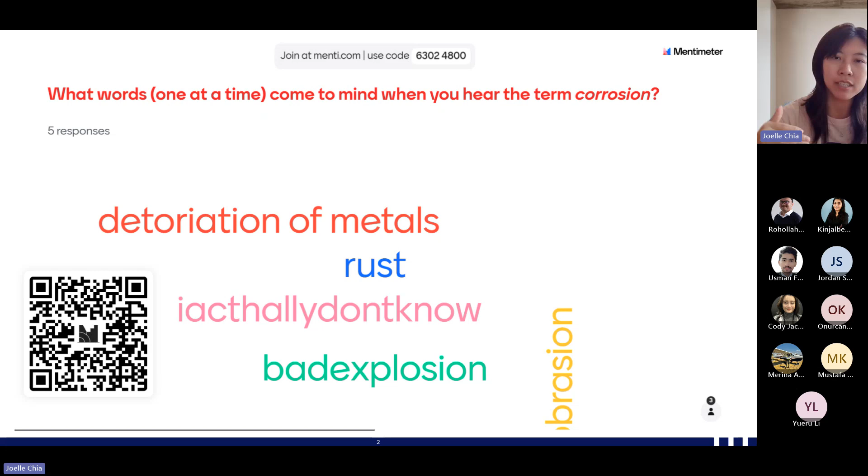So yeah, basically corrosion, I'll explain a little bit about corrosion, specifically atmospheric corrosion. So corrosion happens when some salts or some chemicals in the atmosphere, in the environment, come into contact with metallic structures or metallic materials, and it leads to degradation of the metallic layers. So any kind of metals, they have different kinds of layers in their materials. And when that material degrades, that's corrosion, which means that material is being damaged, a deterioration of metals.

So it can occur anytime. It can occur very quickly. It can occur very slowly, depending on how corrosive that atmosphere, the environment, is. And this can also occur to any kind of metallic structures, including civil structures, the bridge, your car, your computers, as well as aircraft.

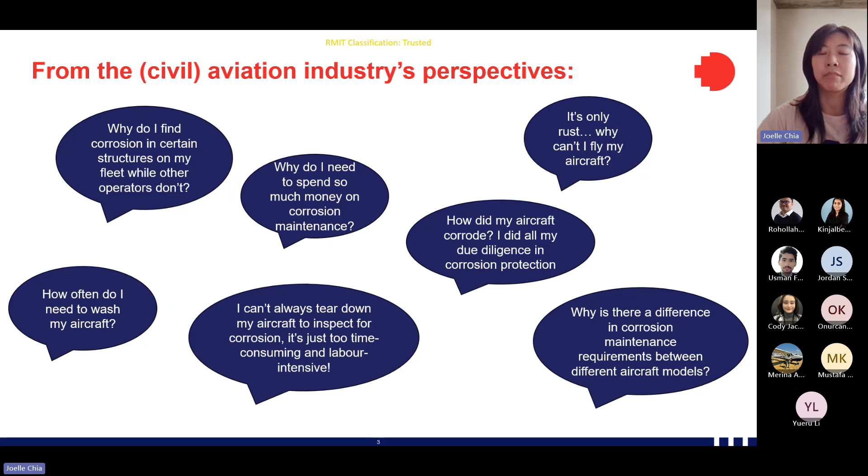So from the aviation industry perspective, most aircraft owners, operators, and mechanics are also not corrosion experts. So they have no idea what corrosion is, but they see it happening on the aircraft. And what concerns them mostly is the cost of having to repair the metallic structures due to corrosion, and the time it takes, as well as safety concerns, because when the metallic structures of the aircraft degrade, it could lead to aircraft accidents. And that has happened a number of times over the past 30 years in aviation history.

So we go on to another question. In this question, I would like to hear your thoughts on what you think can be done to minimize corrosion on aircraft structures. Use of better materials, yes, in terms of redesigning, for example, now aircraft are going more towards composite structures that are less prone to corrosion. So that's one part of it.

Test materials for the long term. Yes and no, because as I said, corrosion can happen in a very short time depending on how corrosive the environment is. So even if you test the materials for the long term, there could be conditions that you are not able to test upfront, which leads to the material degrading due to corrosion in the short term.

So one of the methods to minimize corrosion is to predict when and where it is happening so that you can implement predictive maintenance and inspection before the structure fails. So corrosion prediction models have been developed over the past few decades. And this review that I reference here goes into more details on those established corrosion prediction models.

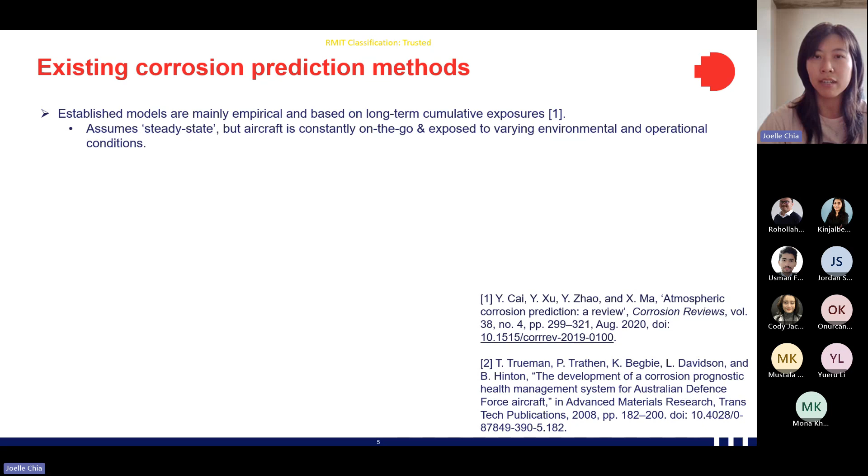But the limitation is that these models are mostly based on long-term cumulative exposure, and they assume that the microclimate and the development of corrosion are in a steady state that averages out over the long-term period. And unfortunately, that would not apply to an aircraft because an aircraft is a very mobile machine that is constantly exposed to different environmental and operational conditions. So we can safely assume that the microclimate and the development of corrosion will be quite variable.

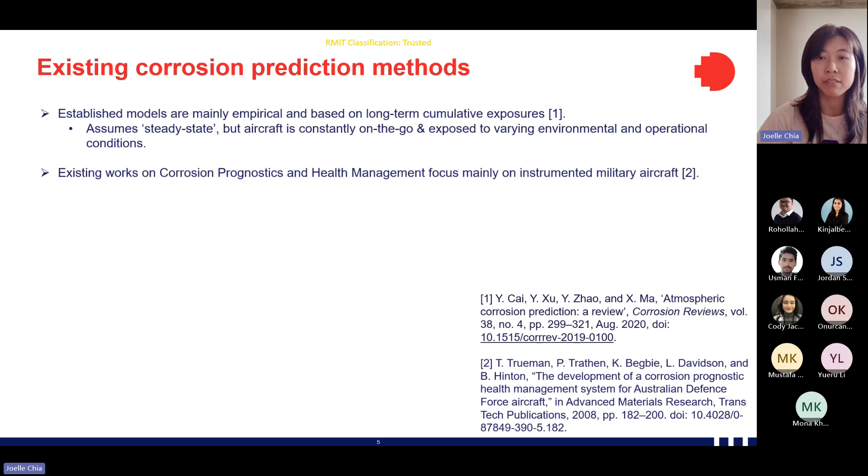And also taking on this assumption, the Australian Defence Force developed a corrosion prediction system in their military aircraft by instrumenting the aircraft with environmental and corrosion sensors. But the problem here is that whatever applies to the defense or military aircraft is not transferable to a civilian aircraft like the commercial aircraft that airlines operate, or like the private jets or even smaller training aircraft like this one over here.

Firstly, they belong to different regulatory bodies, so different regulations and certifications apply. And secondly, which is the most important factor, is that civilian aircraft are more sensitive to weight additions. So that is to say, if we add sensors onto this sort of aircraft, that's adding more weight, which is more payload, and that translates to even higher operating costs. So at this point, the airlines or the aircraft owners would say that's too much trouble. They will just continue washing and inspecting their aircraft for corrosion, and then we're back to square one.

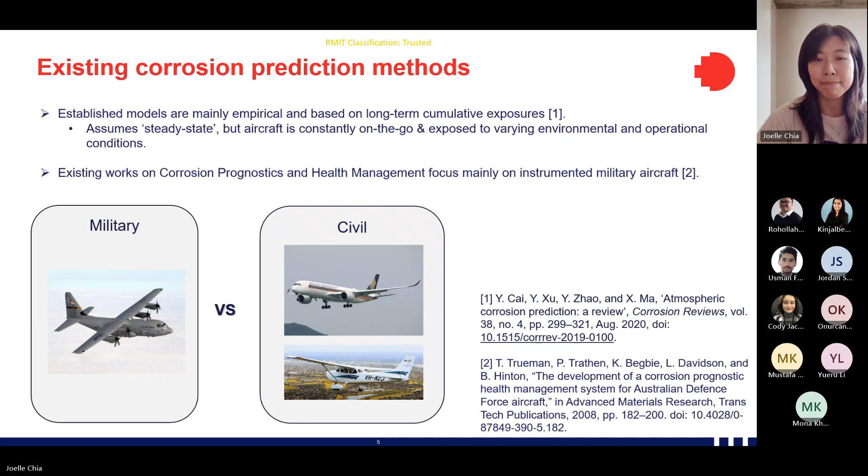So drawing from the identified research gaps, my research integrates the essence of corrosion models, actual operating environment parameters, both in flight and on ground, into an airframe corrosion digital twin. The objectives of my research will be to use an appropriate corrosivity estimation model, which will be defined along the way, to estimate the corrosion exposure in aircraft structures during its operational life. And to accomplish this, I will be using actual in-flight and ground environmental and operational parameters.

Then next, I will develop a prediction model to predict the location and severity of corrosion damages based on the aircraft's operating environment. And then finally, I will develop a unified airframe digital twin with a simulation environment that can support proactive corrosion control and management. So the purpose of integrating the airframe digital twin is also to enable real-time monitoring and prediction. So from these objectives, my research will address three main research questions. And all of these are according to the objectives formulated here.

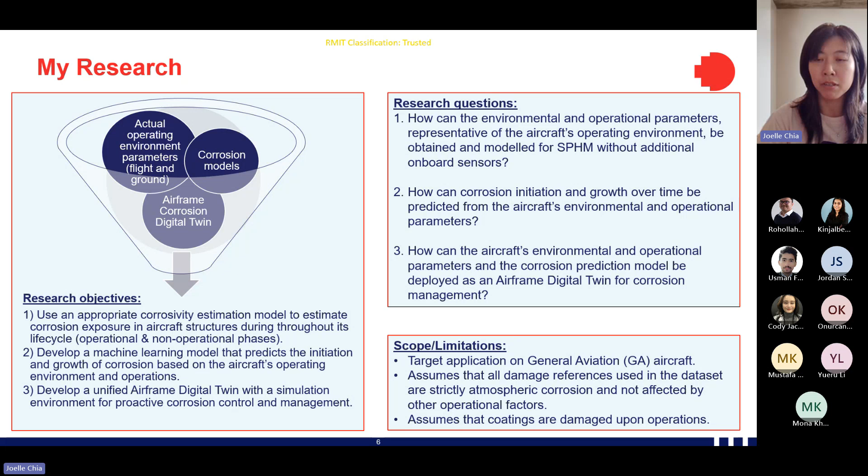And there are certain boundaries within my research where the research is scoped around the application on general aviation aircraft. So for example, flight training aircraft, in which case I have also engaged with the Aviation Academy in our university to obtain actual aircraft data to work on. This research will also only account for atmospheric corrosion in aircraft structural damages, which means we will assume that all damage references used in the dataset are only due to atmospheric corrosion and not contributed by other factors such as fatigue or other operational events. And finally, we also want to assume that coatings are damaged upon operations, so we will disregard coating degradation for simplicity.

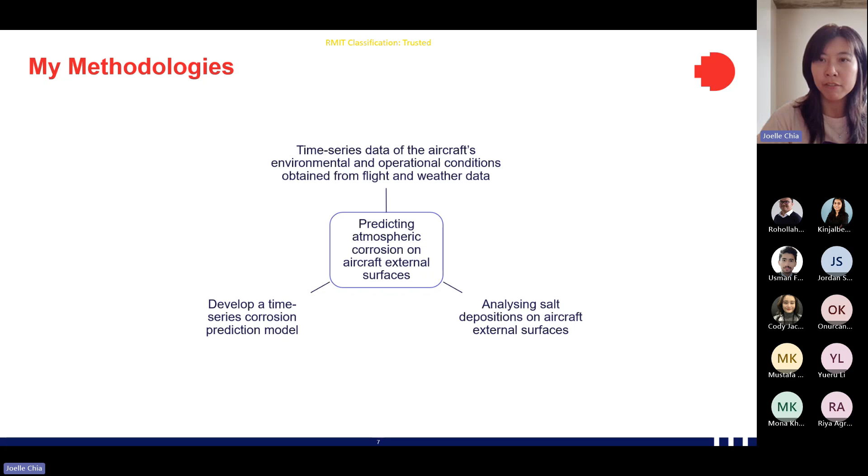So in terms of methodologies, in my research, since I am focusing on predicting atmospheric corrosion on the external surfaces of aircraft, atmospheric corrosion refers to the corrosion that is caused by the interaction of the material with its environment, which is, for example, temperature, relative humidity, how wet the atmosphere is, and the presence and concentration of corrosive salts.

So my first step is to answer the first research question, which is to model the varying environmental and operational conditions in a time series. I am using the flight data from the aircraft's existing flight instrument systems to obtain the geographical coordinates of the aircraft and the operational conditions such as altitude, accelerations, and airspeed over time. And then for environmental parameters such as temperature and relative humidity, I use weather data collected from the Bureau of Meteorology weather stations that are closest to the aircraft at each time.

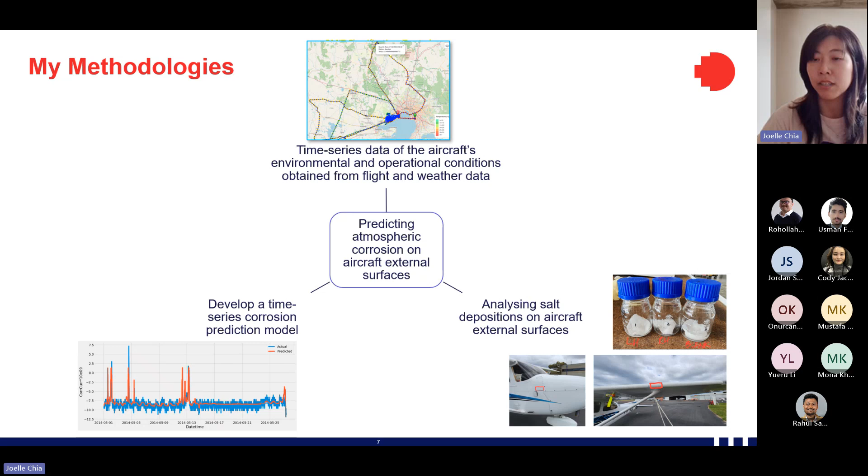The digital twin is not a new concept in general, and it's certainly not in the aerospace context as well. But in aerospace, it has mainly been applied towards defense aircraft and focuses mainly on structural fatigue damages, stress, and cracks. So in my work, I aim to extend the airframe digital twin to corrosion so that the operator or the mechanic can predict when corrosion is likely to occur and implement predictive maintenance measures. And then beyond my research in this PhD, future work can also couple airframe corrosion digital twin with existing fatigue digital twins to extend that coverage of aircraft structural prognostics and health management.

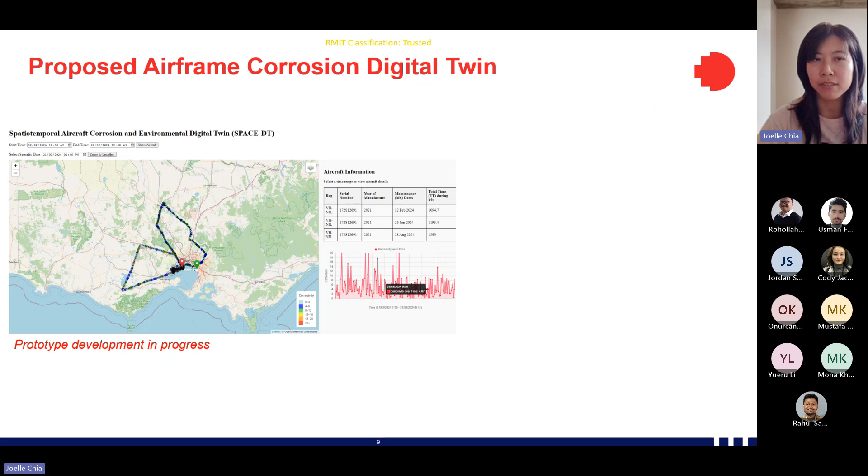Oops, sorry. So what is shown here is a screenshot of a web page of the digital twin that I developed. It's a 2D map-based digital twin. So right here is a spatiotemporal map that tracks the aircraft's historical and latest operating environment, because as introduced earlier, our varying environmental and operational condition consists of both spatial and temporal data. And then right here, a user can define the time window that they want to look at, and the digital tool that is connected to a backend machine learning prediction model will show the user the predicted corrosivity over the defined time window period.

What's more is that not only can the user use this digital tool to look at historical states, they can also simulate a future scenario by defining, for example, the next 1 week of flight operations, and the model will also be able to tell the user how the aircraft might possibly be exposed to any corrosive environments and the extent of corrosivity. This can help the user make decisions on certain flight paths or predict the necessary maintenance if required.